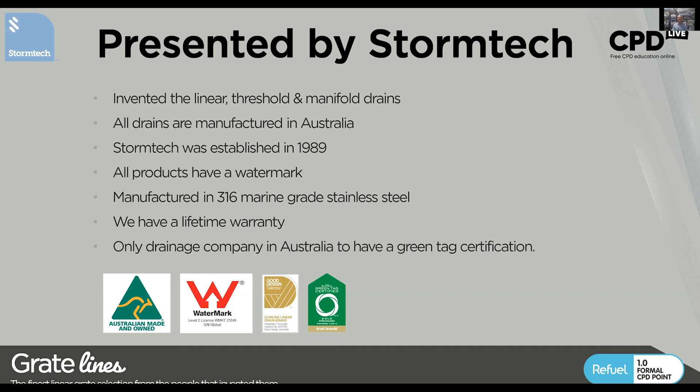All our products have WaterMark, and we seek to exceed the requirements, because the requirements, as we all know, are the minimums. And as such, we've gone for 316 marine grade stainless steel instead of the minimum 304. Given that, we can give a lifetime warranty on our products. And we are the only drainage company in Australia and the world to have a green tag certification. And further to that, we're the only green certified drainage company at all.

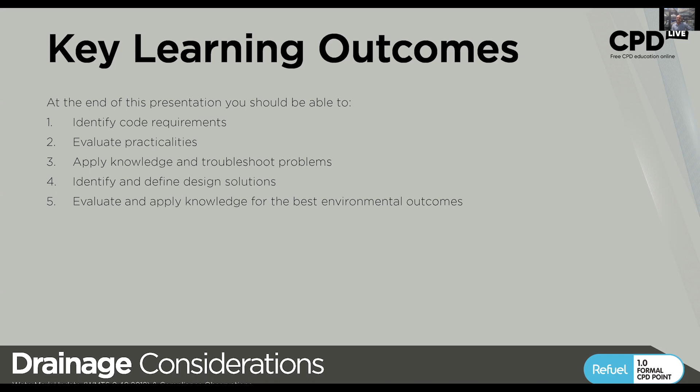Learning outcomes for this: I'm going to be talking about the code, mind-numbingly boring, but I'm going to try and summarize and highlight the important aspects for you. Let's talk about some practicalities and how to apply the knowledge and troubleshoot some problems from a design, from a product selection, and also installation aspects as well. And to be able to create design solutions that will be able to be implemented in the construction. And we're also going to be able to apply the knowledge for best environmental outcomes. So I've actually got a little bit to talk about with that.

So moving straight into it, WaterMark certification, and what is it? So the next slide here, lots of text. So the current iteration of WaterMark is 2018. That superseded the 2016 version. Some significant differences. Main reasons: 2018 introduced a materials section so that there was no confusion or interpretation of unsuitable or not fit for purpose materials. So I've highlighted aluminium here as an example.

Now, aluminium is an awesome metal, but it does have its limitations, just like various timbers and so on. Aluminium is marine grade. You see it on boats and outside quite a bit. But when aluminium fundamentally is put into cement, concrete, buried in the ground, it can fail because it's only tolerant to a pH range of 4 to 8.5.

Anyone that has a pool will be very familiar with the pH ranges of 7.2 to 7.6, and that's what our body likes. So cementitious products such as mortar, cement, concrete, tile glue, grout, bricks, they can initially generate a very high alkalinity of up to 13. That drops off within weeks to around about 10, but it doesn't go below 10. What this tells us is that 10 and the 8.5 of aluminium are not compatible. So aluminium needs to be separated from this alkaline solution. And it's particularly about crevice corrosion.

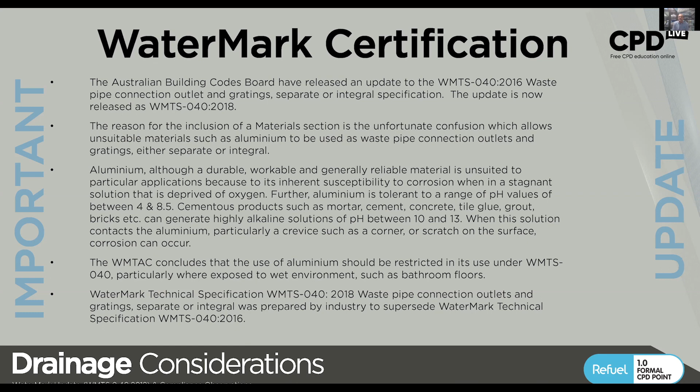So the Aluminium Council and the Australian Window Association released a technical bulletin which gave everyone insight into why this is an issue, hence WaterMark stepping in and updating the code to include a materials section. So anything specified to the WaterMark 2016 is no longer suitable and is not fit for purpose. So here's a little image to show you what I mean by crevice corrosion.

So what happens is aluminium, tough as it is, won't stand up to the alkaline solution. So the alkaline solution on its own is not the fundamental problem. What happens is the stagnant water that stands behind and below tiles, so you've got your tile lines and so on, the grout glue, the water behind there becomes stagnant. What's stagnant? It's when it's deprived of oxygen. Once it's deprived of oxygen, then you have either a mild sulfuric or a mild hydrochloric acid solution.

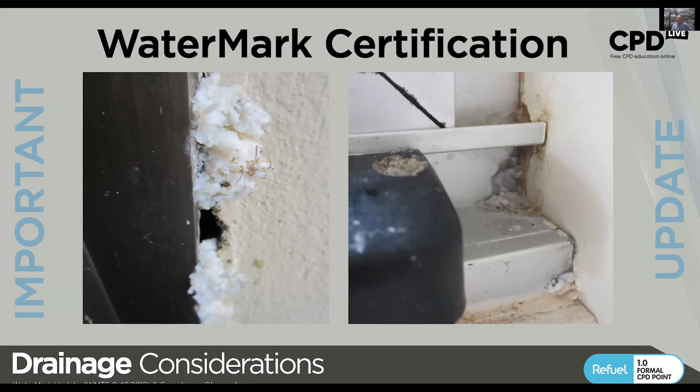By mild, I mean very. You're not going to hurt yourself with it, but it's that rotten egg smell that you might notice from damp floors and so on. That's when you're getting an aggressive solution in there. Now what happens is that solution softens the anodizing of the aluminium, and any crevices such as joints and connections in there are then attacked, and it can be weeks, literally just weeks, before the aluminium begins to fail, and it's an expensive job to remove it. Aluminium gratings in, say, plastic channel and so on, they're fine, there's no problem with those.

Moving on from that, let's have a look at some considerations for drainage in different applications like bathroom, laundry, and thresholds. So if we look at interior areas, bathrooms are obviously one of the more popular areas to personalize, particularly from a design perspective.

From an installation perspective, it's also one of the more critical rooms to get right. So what are the really key considerations? How much water we're putting in and how we get that water out. Very simple, but the devil's always in the detail.

So what we're going to do is a little introduction into Australian Standard 3500 in relation to drainage. So 3500 covers a lot of areas, but the drainage is what I'm going to focus on today because I'm the drain guy. Yay, good for me.

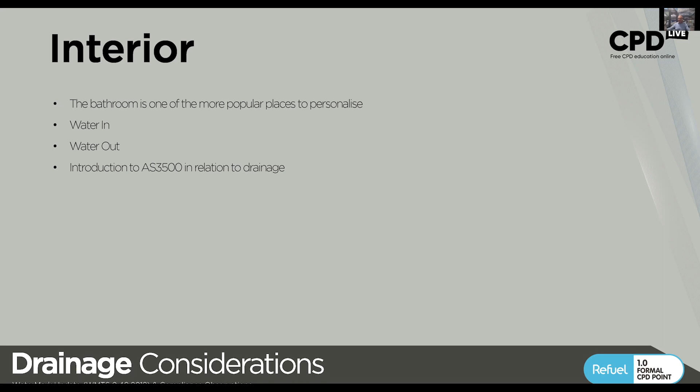So before we go into the code itself, where does the code get its information from? Now, I like to introduce people to this because AS 3500, the NCC, BCA, PCA, etc., all take their information from some very fundamental Australian standards and codes. I call them a foundation standard because it's what the rest of it stands on.

3500 takes its information from lots of different sources, and for this, we'll be looking at what's related in 3500, the current version, 3500 Part 2. Part 2 is the sanitary drainage section. 2018 is the current version. So we've got two real aspects in 3500 that we're going to be focusing on, and that's Part 4.6.7 and 13.17. 4.6.7 is about sanitary drainage, and Section 13 is about fittings and fixtures.

Where do they get their information from? They take their information from AS 2887, waste and grates, and WaterMark. Where does WaterMark get its information from? It gets its information from 2887. Now, this is a very old document. It dates back to the 60s, and there's also some other aspects of it that we'll talk about now.

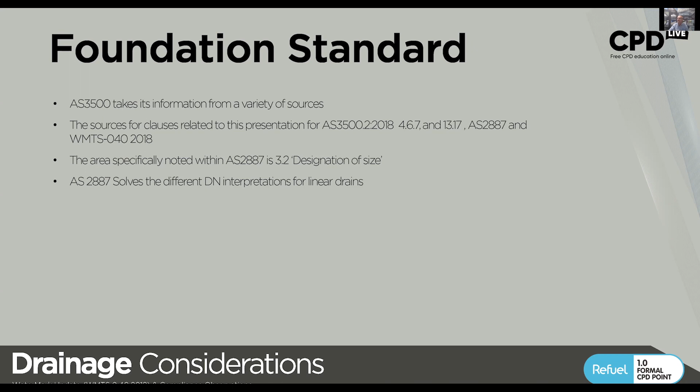So why is this important? I'll show you. So on the left, we have WaterMark WMTS 040 2018, which is the old MP52, and that does come from the 60s. AS 2887 is from the 80s and 90s, unchanged from the 90s. They've just done a bit of a text update to it. What I draw your attention to is the two tables, Table 1 and Table 3.1. If you can see it clearly on the screen, I realise the right-hand one's a little bit fuzzy. You'll see that they are identical.

I want to point this out because it shows that WaterMark takes its info from 2887 and so does 3500. The information transferring through from the foundation to the current iteration is identical. And it's critical information for designers of drainage like me for the product side, but it's also important for yourselves to understand where this information comes from so you've got a better idea of what size suits what.

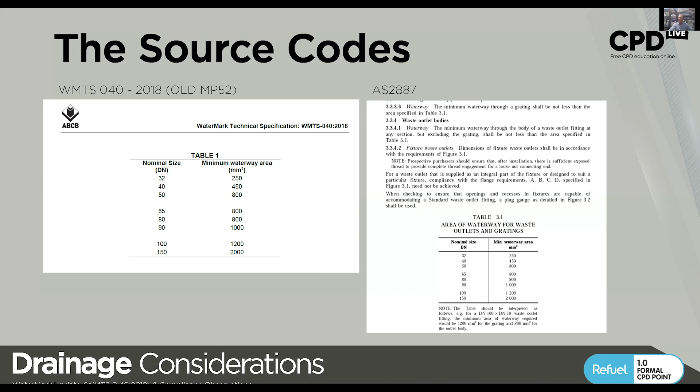So the water in the drain, that's called the waterway. There are two aspects of the waterway in a drain. Firstly, the waste outlet connection of the waterway, so that's the bit that goes into the riser. Then it's the grating waterway, and these are different components. Linear grates, as I'm a specialist, obviously I'm talking about those a fair bit. Linear grates have a far larger waterway than the waste outlet.

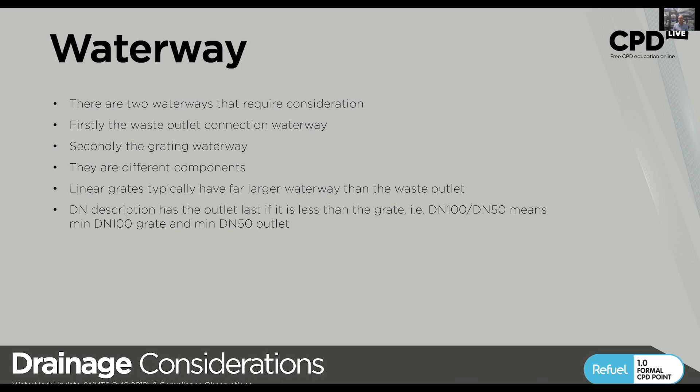Now, when you're looking at the DN description, DN is the fitting outlet size descriptor, a linear grate has a large waterway. The outlet has a pretty much fixed waterway, so whatever is largest goes first, and the outlet always goes last. So if they're the same, then it'd be 50-50, but in this example, I've gone a 100 grate over a DN50 outlet. Here's a picture.

So the DN for the grate. You can see a linear on the right and a standard centre waste on the left. So the grating has a DN 150 rating, and in reality it's more like a DN 1000, but we limit it to a 300 mil length. You don't need to worry about that; I just like to explain these little details. So you can see there are two DN 50 outlet wastes.

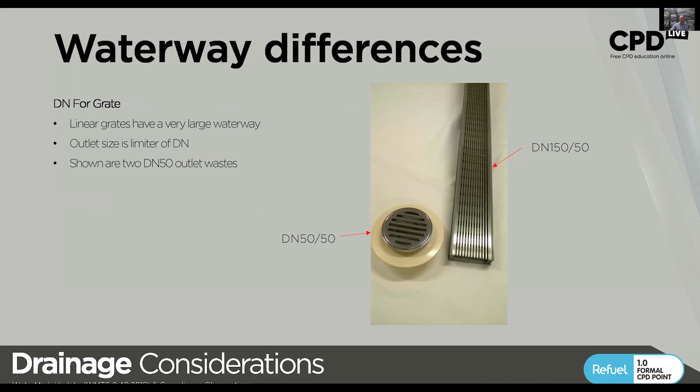So here's a different way to view the same part. They both have the same size waste outlet to connect into a DN 50 riser in the bathroom. But as you can see, the grate on the left, the standard grate, has a very small waterway compared to the grate on the right.

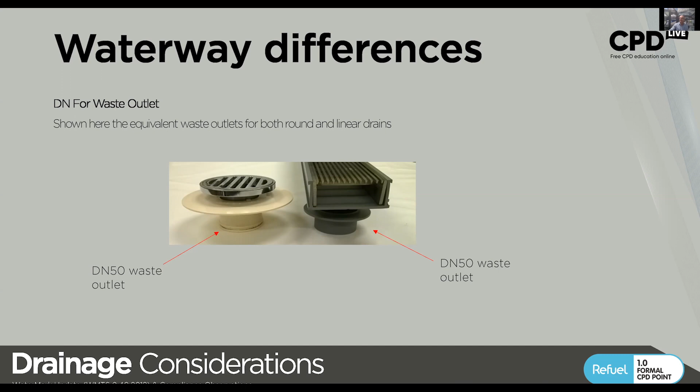So, fit for purpose. What is the WaterMark fit for purpose? Well, fit for purpose just means it's been tested, mechanically tested, physically tested, and dimensionally tested. Fit for purpose means, as best as we can tell, it's fitting to the minimum requirements. Let's not forget that standards are the minimum, not the maximum. It's accredited to the minimum requirements for plumbing safety. It's the old type tested that's been moved forward.

Now, devil in the detail. The little jobby on the picture there is watermarked as a system, which means you can't use these components separately.

You can't throw away that little grate and use that flange on its own. That would be a non-complying construction method. And for those on the installation side of the presentation here today, watch out. You will be at fault for that mistake. And what that means is your building insurance will be void.

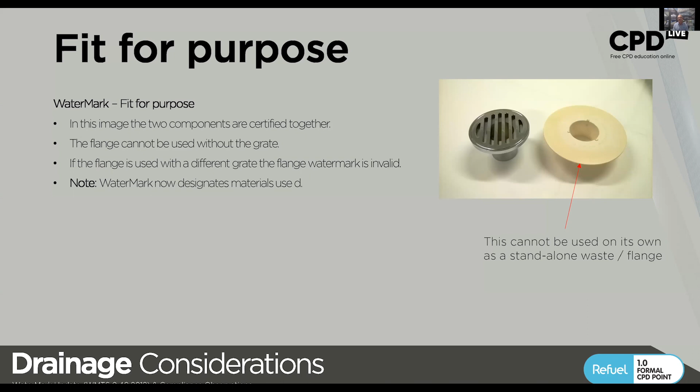So I point this out because it's an area I've been involved in as expert witness on a number of jobs, and that has come out as part of the problem because it didn't work, either because the DN was incorrect or because the installation was incorrect, and they didn't use the system as it was intended.

A couple of observations for you. Around the country, the standard is the same, but there are typical uses. So Queensland, 50 shower over a 50 riser. WA, it's DN 80, which is very popular. South Australia, it's 80, but that's now in recent months moving more towards 100. Victoria, DN 50. NT, DN 50, but NT varies a lot.

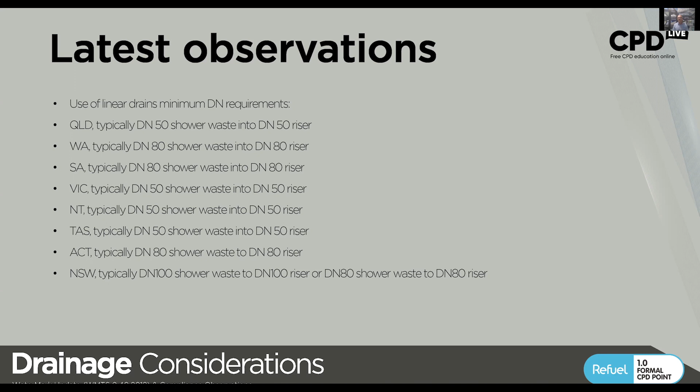It depends on where the developer or the builder is from, and they use their own preferred method as long as it sticks to Australian standard. ACT is 80, very popular, although again that's shifting to 100, and New South Wales is 100. A little bit of information on why DN 100 is becoming more popular: it's just because it's cheaper than DN 80 on the piping side.

The two waterways in a bathroom. So as I mentioned, AS 3500 Part 2, 2018 is where we get our code minimum requirements. I've already covered 4.6.7 for floor waste gullies, and for the grating it's 4.6.7.6, and that actually speaks about linear drains and standard wastes. The other part, fittings and fixtures, 13.17 showers. I'll talk a little bit more about that because there's a difference between individual showers and common showers.

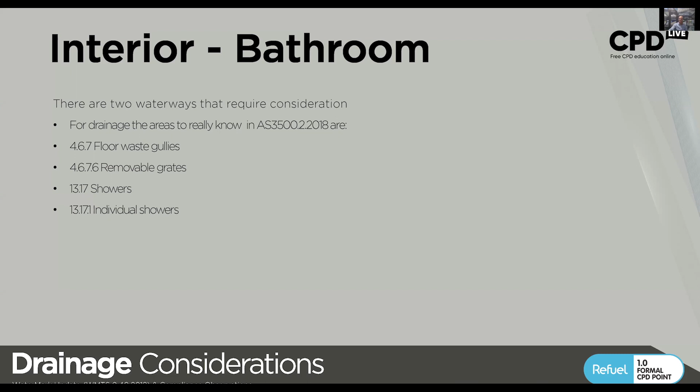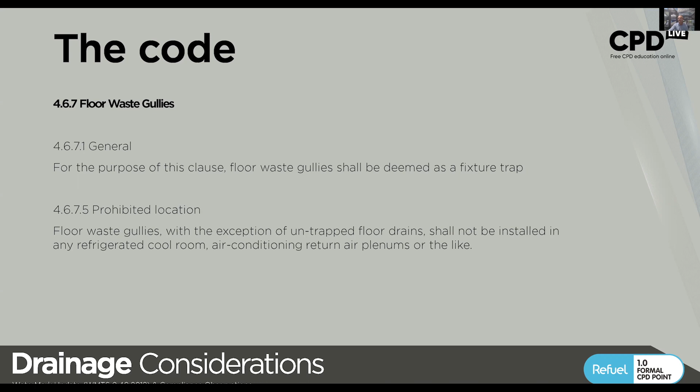For the code, 4.6.7, I'm not going to labour this too much, but it will be deemed as a fixture trap, which means it fits in Part 4 and Part 13. And prohibited locations, this is something for people to remember. Floor waste gullies shouldn't be installed in any cool rooms and air conditioned return areas. So that's more for commercial application, but it's good to know. And also those locations typically require a load rated grate because you're getting trolleys, pallet jacks and so on going through there.

But there's a practical aspect. There aren't many people in the trade, plumbers I'm thinking of here, that can get their hand into a DN80 to clear a trap out. With DN100, just about everyone can get their arm down about 300 mil to the trap.

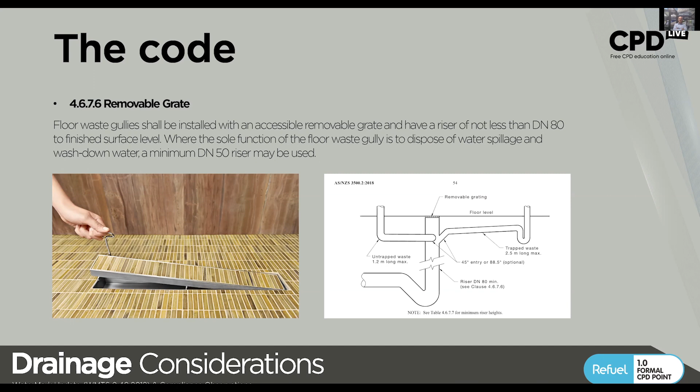And for a shower, you need to have a minimum DN80 riser coming towards it. And we'll go into that on the next slide here. So if you look at the top, again, a little bit fuzzy, I apologize for that.

If the shower drain is intended to be the only floor waste in the bathroom, then it needs to be minimum DN80, though DN100 is practically better. That affects your design - you have to make sure the grating is at least the DN of the riser. Now, if you have a main riser in the bathroom that's in the floor but not in the shower, then you can run the shower with a DN40 waste. So you don't have to stick to a large grate in the shower if you've got another minimum DN80 floor waste gully in the bathroom.

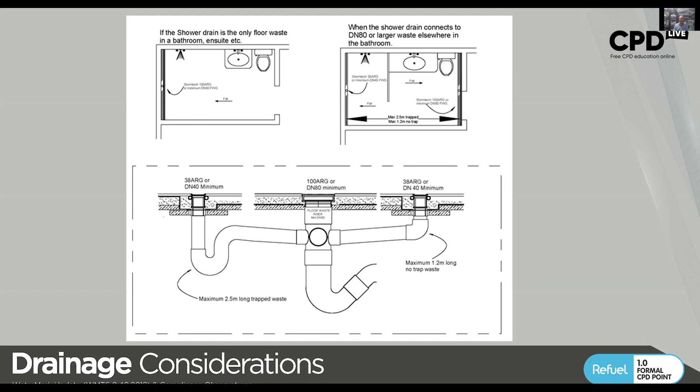So we'll go on now to a bit more on the shower side. We're under fittings and fixtures, part 13 of 3500, individual showers. An individual shower shall be a minimum DN80 grate or channel grate, and shall be connected by an untrapped waste not smaller than DN40 to a floor waste gully - that's the picture on the right here - or a trapped waste pipe not smaller than DN40.

I've put a note in there for prefabricated shower bases - this is literally extracted straight out of the code, word for word: in accordance with manufacturer's instructions. So to the specifiers and installers here, there's two things to bear in mind. You've got the code, which is the minimum, and then you have manufacturers like me with our installation instructions. When we're certifying a product, our installation instructions are also assessed to determine whether they're suitable to achieve the minimum. So when specifying and installing, it's critical to check not only the code, which is the minimum, but also the manufacturer's instructions.

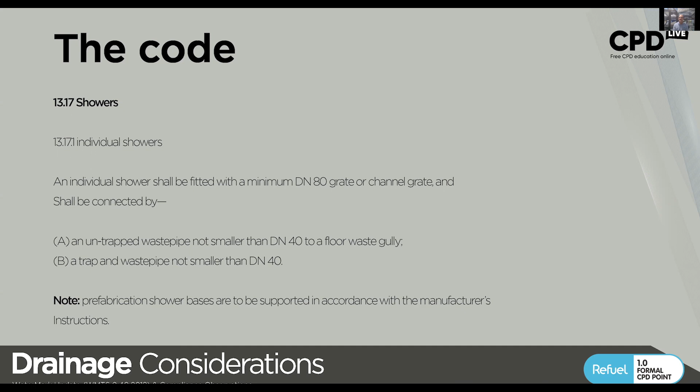In those that have had waterproofing shenanigans, you'd understand that something like water-resistant plasterboard - no manufacturer actually says it can be used in a shower without it being waterproofed. Little word to the wise there.

Now here we come to shower groups. We've just done individual showers, now shower groups. So what's a shower group? It goes to a common shower, or common channel. Often shower groups go to a common channel - that would be something like a gymnasium or a barracks, where you've got a linear drain at the end of the room and a whole bunch of open showers or shower cubicles all draining to a common channel.

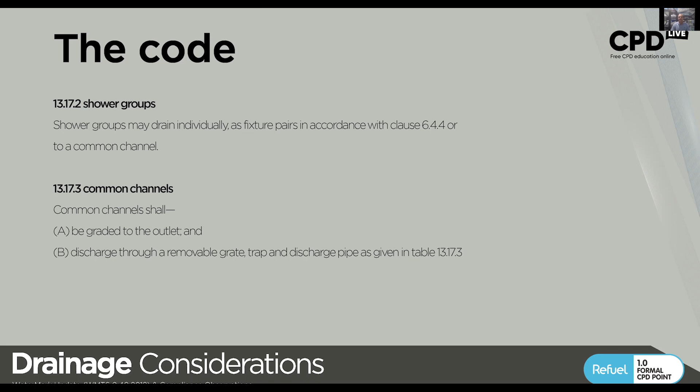This next table tells you the size of the grate - hence why I wanted to highlight that there are different DNs of the grate and the discharge pipe. So one shower: minimum DN80 grate, and the outlet pipe is minimum DN40 - but don't forget the distances and riser issues there. Now, if you've got 2 to 3 showers, same size grate but DN50 waste pipe, and 4 to 6 showers, DN100 grate with a minimum DN65 discharge pipe.

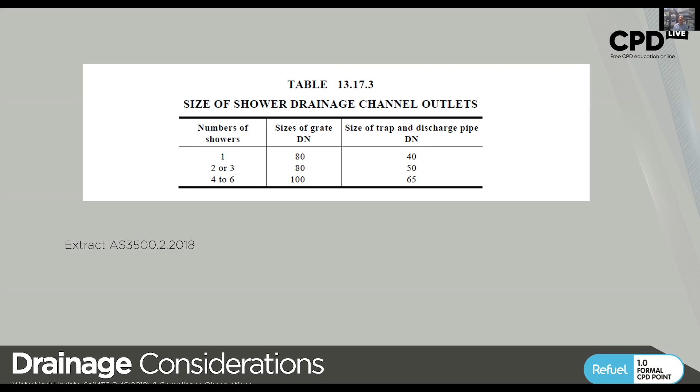Rule of thumb, to make it easy to not only achieve the minimum but avoid certification issues: go with DN100 on your discharge pipe and your grating. Unless the design aesthetic calls for minimizing the size of the grating, then you can take it down to DN40 and have a disconnector gully. We'll talk about those later.

So the practicalities - do we need a floor drain in the bathroom? Not really. If you have your shower waste sized to suit the minimum DN80 riser requirement, it's contentious whether you have one in the main bathroom floor, but it does solve design issues, and it's relatively cheap at the design stage to include in construction because it's very easily costed for the builder.

So you can have just one in the shower, and the shower can be used as a floor waste gully - but remember the code. Now we've got wall installations. I love putting my drains up against the wall - it's just some of the best look, and I've got new product releasing later in the year to solve that and make it look invisible. But I'll leave you with that tease and show you a nice little photo here.

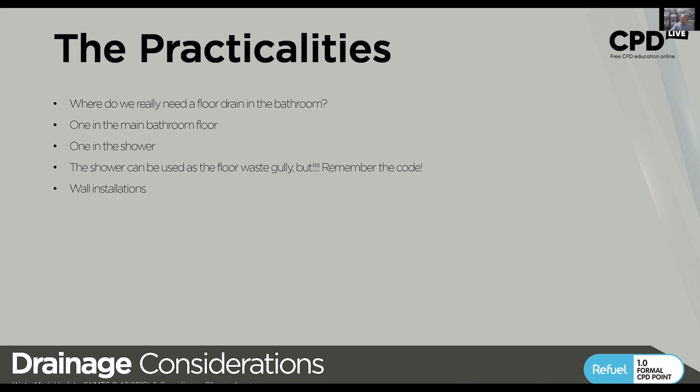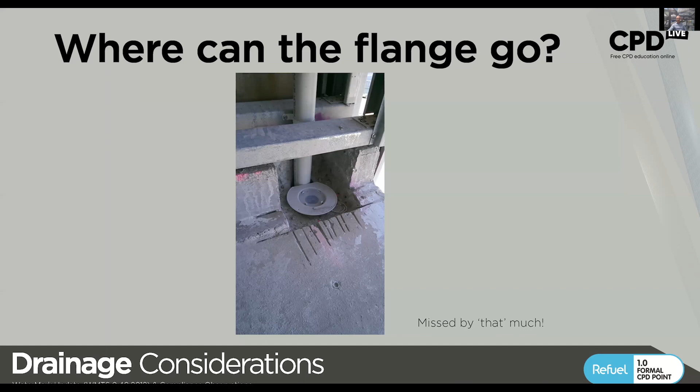Where can the flange go? AS 3740 for interior or domestic wet areas requires a flange, a leak control flange, onto your riser pipe. This is a really good example of what I see time and time again on a building site - once that wall is constructed, you've got virtually no access to that drain, and the grating outlet has got to be severely offset. That's something I've seen, and I think we've all probably seen that. So just because it looks good does not mean it is correct.

Now it's important to understand the current iteration of WaterMark. It is 2018. Why do I say that, and why do I give you the answer flat out? It's because a week and a half ago the ABCB released the 2020 version, and I have a 2020 version of this presentation, but they've rescinded it and reverted back to 2018 until they work out some technical issues.

Is PVC a suitable material for sanitary drain? Of course it is. Now the minimum DN connection for a shower - I put that one in there to trap you, because I've been talking about DN 100, but if you're connecting the shower from an accessible main riser elsewhere in the bathroom to the shower, or a disconnector gully, which we'll get to, DN 40 is the one.

Yes, custom drains can be manufactured to size - that's what I specialize in. Floor waste gullies shall be installed with an accessible removable grate. Of course they should - how are you going to maintain it if you don't?

Can you install a non-WaterMark sanitary drain? Trick there - the really interesting part is the term sanitary drain. Stormwater does not have WaterMark. So for sanitary drain, if it doesn't have a WaterMark, no, you can't install it.

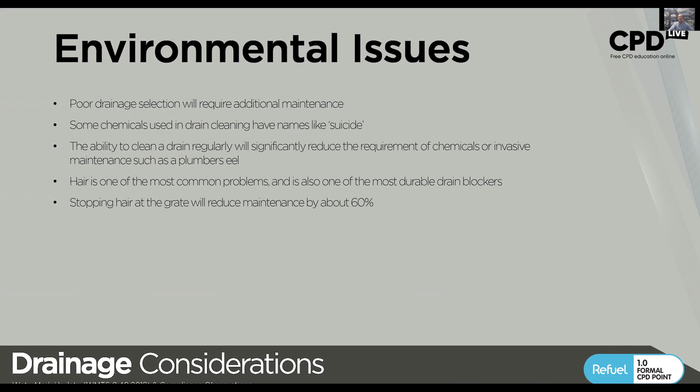Hair is just - I mean, look at mummies. They dig them out of the ground after thousands of years and they've still got hair, sometimes with the henna in it. Hair is about 60% of drainage problems, so it can and will persist in drains for years, and people have a lot of fun with their hair.

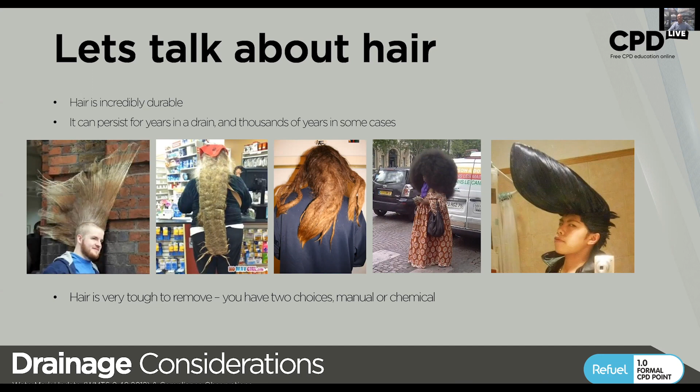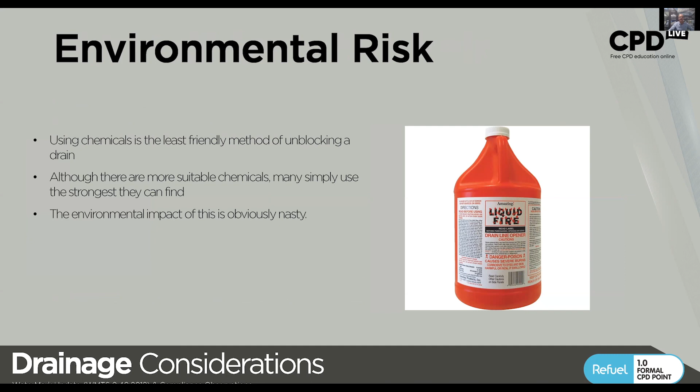Hair removal: two choices, manual or chemical. What's the problem with hair? 60% of shower blockages are from hair. Liquid fire is one from down the road, and it's pretty obvious how bad for the environment that would be.

Sensible options - obviously I do linear drains, but a standard centre waste can do this as well. Reduce the hair at the grating; use the grating as a GPT, a gross pollutant trap. Strainer grates are the most effective because you stop the hair at the surface and don't have the maintenance issues. I've had them in my house for over a decade and I've never had a hair blockage.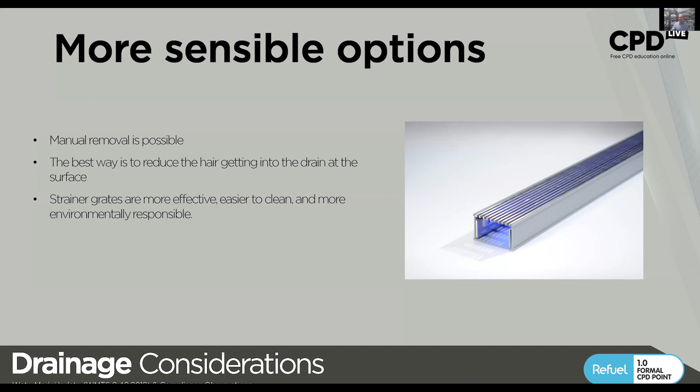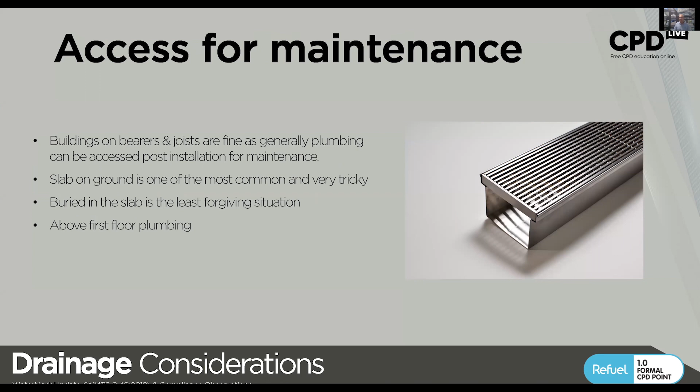Access for maintenance - so when we're designing, making sure we've got access for maintenance is critical. Bearers and joists, you can typically get underneath it. Slab on ground, no you can't. Buried in the slab - having started out in the concreting industry, it always bothered me, because your vibrator in the concrete can crack the pipe and you've got one heck of a situation to fix. Above first floor plumbing, you can typically access it through the ceiling.

Now, going back to the wall application, there's a specific requirement, and this will be coming up in the latest update to 3740.

And we'll talk about disconnector gullies very shortly. So we've got here an image of basically a flanged channel that becomes your leak control flange connecting directly to the pipe, and your waterproofing is adhered directly to the tray flanges.

As per the current iteration of 3740, these flanges must be a minimum of 50 millimeters. 20 mil is a tiling flange. And again, if that lets go, the building insurance is void. Make sure you do a 50 mil flange. This allows you to have the drain right up against the wall, be it a grating type or a tile insert type. So here we have disconnector gullies.

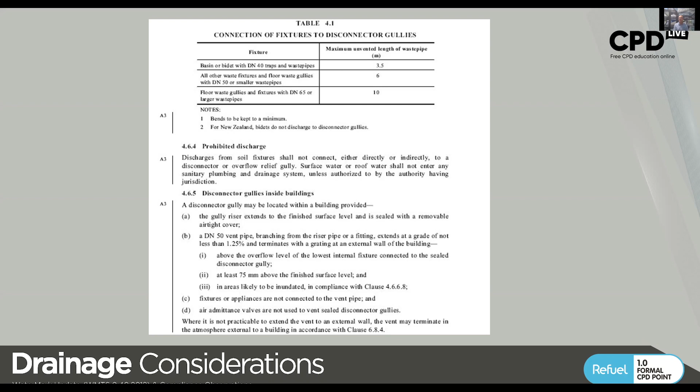What is a disconnector gully? A disconnector gully, as you can see from the table there, gives you a much greater distance from your fixture waste to the trap, to the gully. So I won't dwell on this for too long, but it is important to know that you can get an extension on these distances by using a disconnector gully.

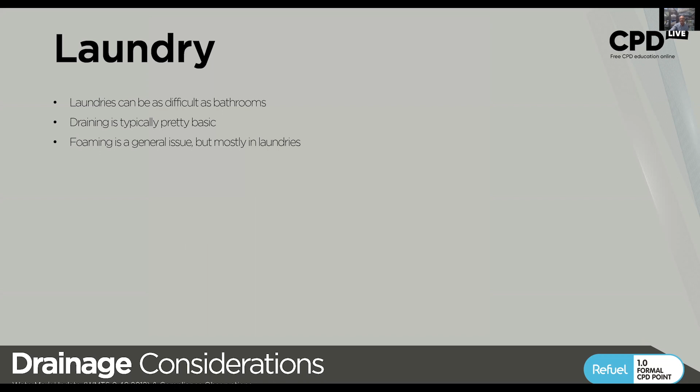Now the laundry. Laundries can be as difficult as bathrooms, mainly from a waterproofing aspect, but the drainage is also critical because it's very basic drainage. You don't actually need a floor drain in a laundry, depending on the jurisdiction you're in. And foaming is a general issue for all drainage, but it's mostly an issue in the laundries, occasionally in the kitchens and the bathrooms. Depends on the hardness of the water typically.

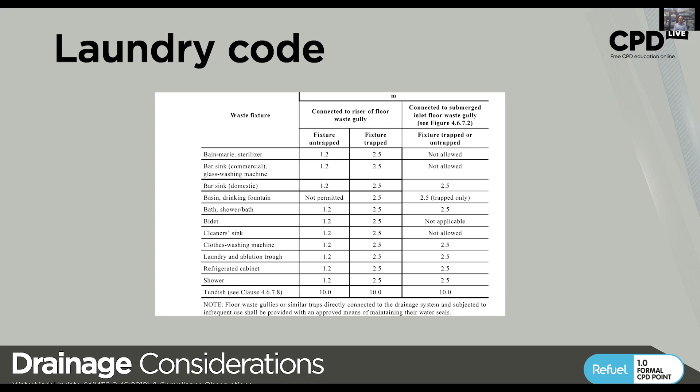So here we have a quick summary, again, an extract straight out of the code. And you can see that you've got the connection distance to the gully, and it's pretty much identical to the bathroom one. Just wanted to highlight that for you. So the laundry code is pretty straightforward.

So here's a bit of a summary. DN40 is the minimum connection. Most of the time, it's a DN50 connection because it's cheaper than DN40. Section 8.4 talks about your laundry troughs, and no trough or washing machine is to be connected directly to the stack, you use a disconnector gully. Those in the trade or those dealing with plumbers directly, they'll often call that a disco gully. And section 11.23.2, again, the minimum is DN40.

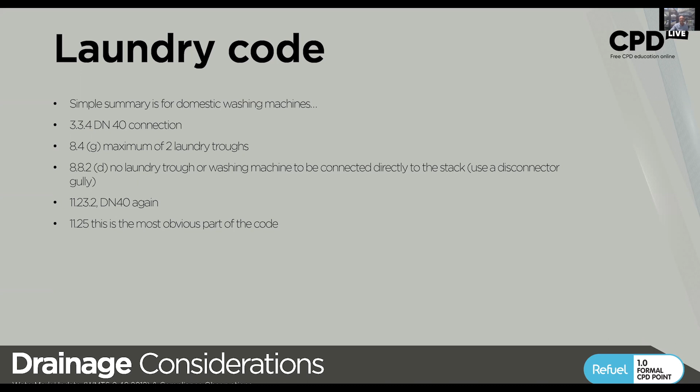And here we go to 13.25, clothes washing machines. Again, they're talking DN40, but the reality is most of the time it's DN50 as it's cheaper and easy to use.

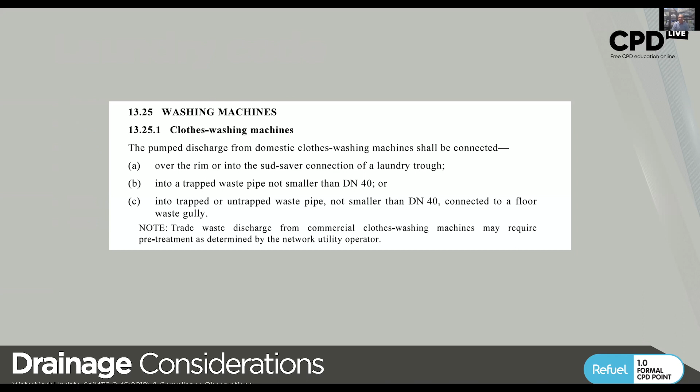Laundry practicalities. So from a design perspective, if you're putting a floor drain in, it should be near the troughs and the washing machine if possible, because you are going to be typically doing a 1.2 or 2.5 metre connection to it. And if you have a floor drain in there, it should preferably be near an external door. And generally only one floor drain is required in the laundry.

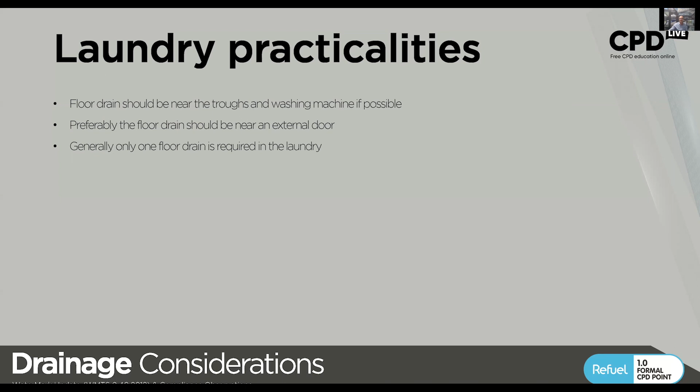Problems: foaming, as I mentioned, is a main issue. Insufficient drainage, now this is in the laundry, we're dumping our clothes on the floor. If you've got a centre waste, they can be blocked. And drain blockage in the laundry is generally due to the high use and debris from your clothes like lint, but you'll also find coins and paper clips and hair clips and so on in there as well.

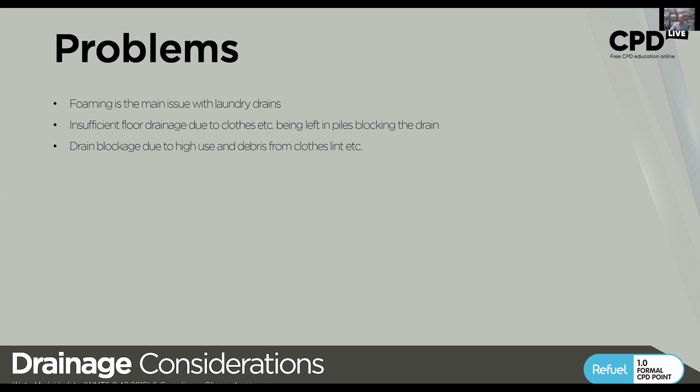We've spoken about foaming. You can run it through a sud saver, so it's reusing the previous water. Extend the distance up to 2.5 to the main waste. For drains being covered over, a linear drain is a simple and elegant solution, because no matter how many clothes you put down, there's typically a point where the water can sneak into the drain, same as in bathrooms and floor mats. Oversize the drain to make it easier for access to cleaning, as I mentioned before. So it's very similar to the bathrooms. And again, disconnector gullies, which could be on the outside of the building, make it easier to access for maintenance.

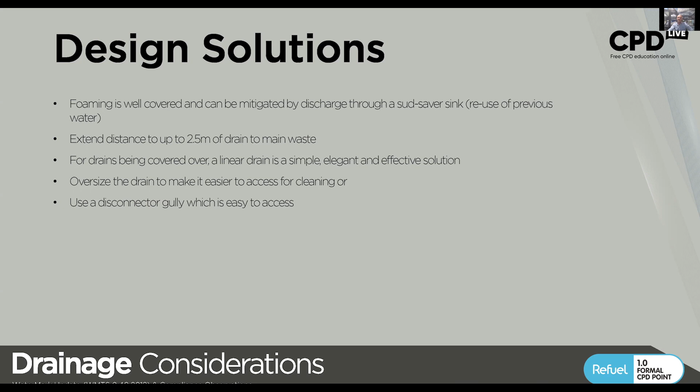Now, thresholds. Thresholds are something I've loved to introduce to the Australian and the world building industry. Why do we do level thresholds? It was mainly for the elderly and those in wheelchairs and so on. It wasn't meant to be a designer feature, but they do look good. If anyone's ever seen the movie The Party, that one's a very famous property. You can still go and visit in Los Angeles, and they have a lot of level thresholds with no drainage. Apparently it's hard to maintain.

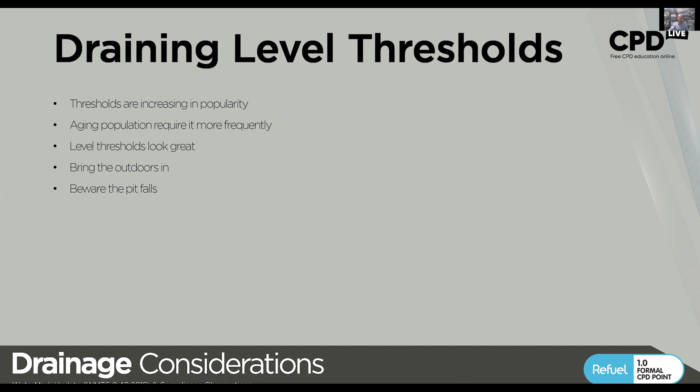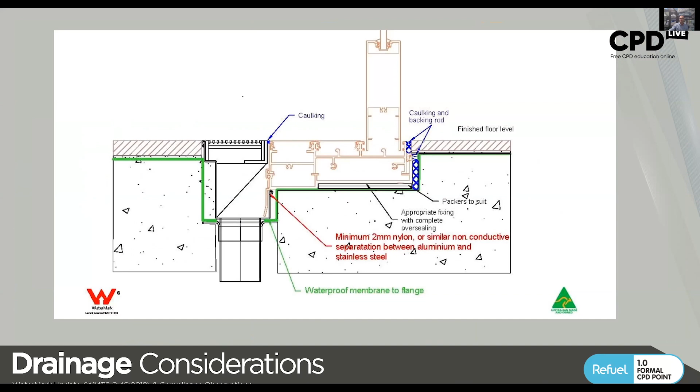The code for level thresholds is mostly covered under the external waterproofing code 4654, with an aspect also in the NCC. Instead of going through all the text, here's a picture of what that code intends: your door track and subsill are above and separate to the waterproofing, with drainage outboard and lower than the subsill, and level grating on top to provide the finished level surface.

3500 also talks about a level threshold, and as you can see here...

We need to stop water from entering the building. For the design aspect, you need to slope the surface away from the door. Even though you have a drain at the door, do not slope towards the door. The grating is there to take water away from the door or window, not from the surface area—you still need to slope it away.

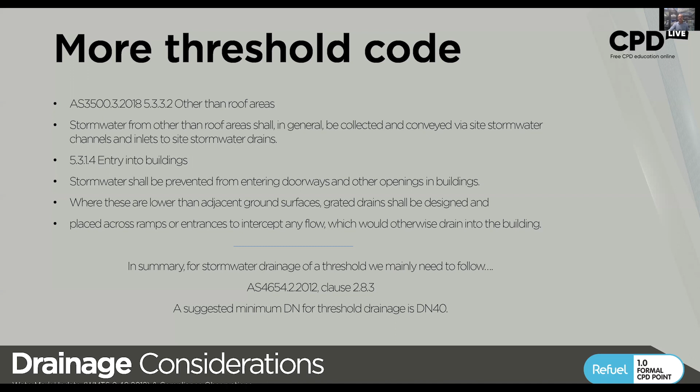Then we've got the practicalities of it. A step down is normally how we waterproof the building to make sure water from the outside doesn't make its way inside. That step down is typically determined by the terrain category—an N2 area typically means a 50mm step down, and you can create that step down within the drain as per 4654.

Most door and window manufacturers are now familiar with level thresholds and can accommodate a level drain for you. Obviously, they often come to us to do it for them, and other guys like me. Now, the drain component alters the sequence of construction, so when designing or installing, you have to understand if you've got a linear drain or a level threshold—often the drain needs to go in at the threshold before the door track, and that can really cause problems on the construction sequence and cause delay, which we don't want.

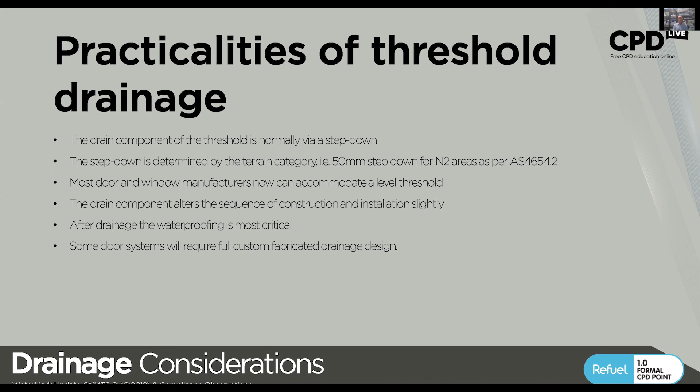After the drainage, which is my area, I think what's more critical is the waterproofing. So 4654 and 3740 are the two key codes to examine. Some door systems will require a fully custom fabricated drain, but that's pretty easily accommodated these days.

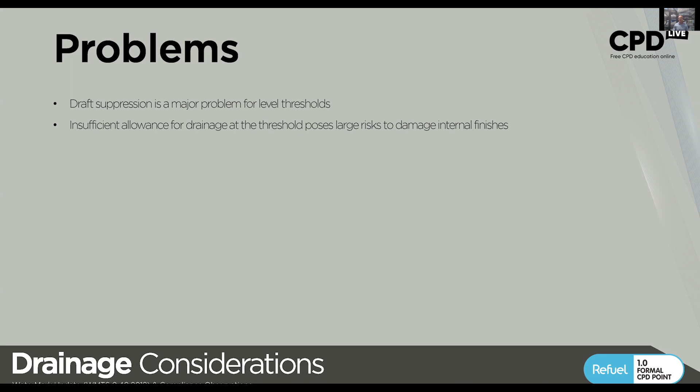Problems: draft suppression is a major issue for thresholds, so make sure you have the appropriate internal draft suppression for your sliding door that is not touching the drain or the door track. Insufficient allowance for drainage at the threshold poses a large risk for damage to internal finishes—damp onto your timber floor is probably a good example.

Design solutions should allow sufficient depth for the water to fall below the subsill. Key word: subsill—because the drain has to be typically about 30 mil lower than the subsill to allow for the volume of water in a 100-year rain event.

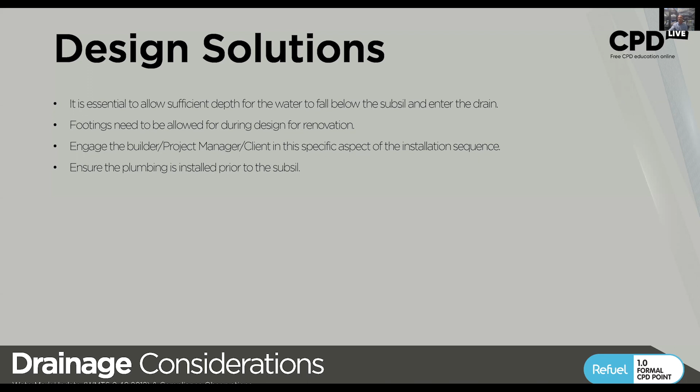You might need to look at how you're doing your footings to allow for a level threshold during design, or if you're doing a renovation—but also on the installation, it's not necessarily business as usual. It's critical to have all stakeholders engaged on this one detail: the builder, project manager, and possibly even the client, because it might change what they expect. Ensure you've allowed for plumbing to be in the correct position before installing the subsill. You can achieve some beautiful results like this one.

So, where does the water go? Typically, insufficient depth for the water to fall below the subsill is something I see a lot. Again, as I mentioned, the footings—it is a collaborative effort to get these right, and as I mentioned, the plumbing's got to go first.

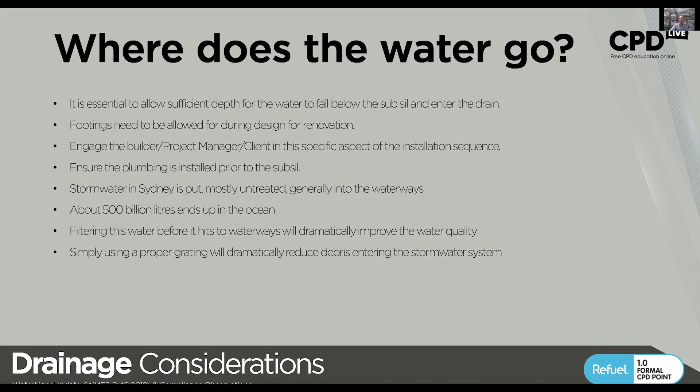In Sydney, stormwater is put mostly untreated into the waterways—about 500 billion litres ends up in the ocean, which is about the entire Sydney Harbour in a year. So filtering this water is incredibly important because it hits the waterways and will improve the environment for all of us. Using the correct grating will reduce the amount of debris getting in there.

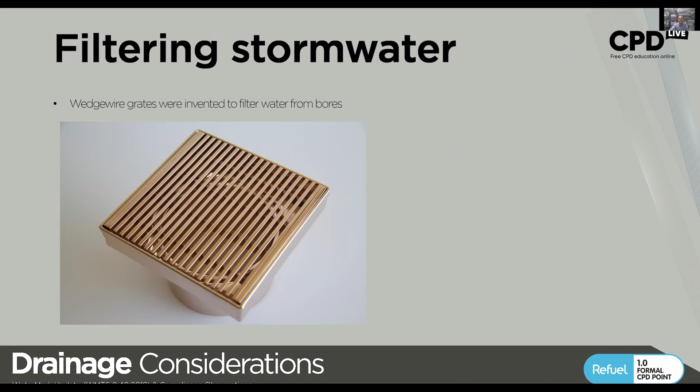Wedge wire grates were invented to filter water from bores about 100 years ago. We investigated what the best filter grates are and went to a 2mm aperture grating. It stops hair really well, also stops cigarette butts being ground through, and stops drinking straws getting pushed in and blocking up a linear grate.

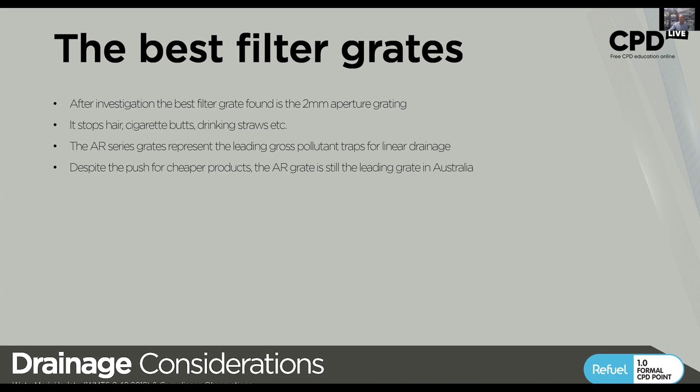The AR series is pretty much the best gross pollutant trap for linear drainage. Despite the push for cheaper products, we've discovered that Aussies are pretty switched on, and it's still the leading grate in Australia. There's a little infographic you can grab from our website, or obviously from this presentation as well.

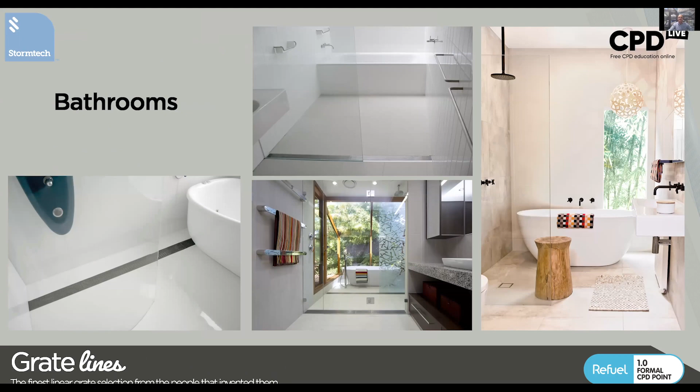So here we have some applications. We have bathrooms, we have the thresholds, as you've seen most of those, and there are commercial solutions—there aren't many drainage applications or aesthetic solutions that we can't provide.

The bottom left example is the drill core library in South Australia, where we were actually asked to produce a grating out of Corten to match the facade of the building, which we did, and it does match the building.

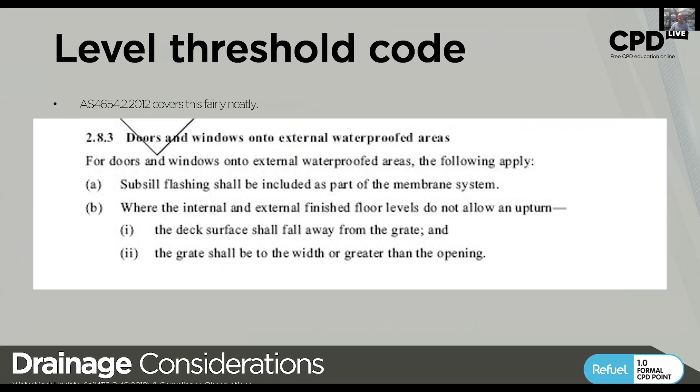If you don't have a drain being used frequently, that water will evaporate, and 3500 requires you to use something like a trap primer to drip water very slowly into that drain to maintain the water seal. If the water seal's gone, that will be the main reason for you to get an odour in your drain.

The water seal serves two purposes. One is to reduce pest intrusion, although as we all know, cockroaches swim quite well. And two, the main one, is for odour issues.

Cool, thanks, Troy. Last question I have here from Joanna. Can you please explain what a disconnected gully is? Yes.

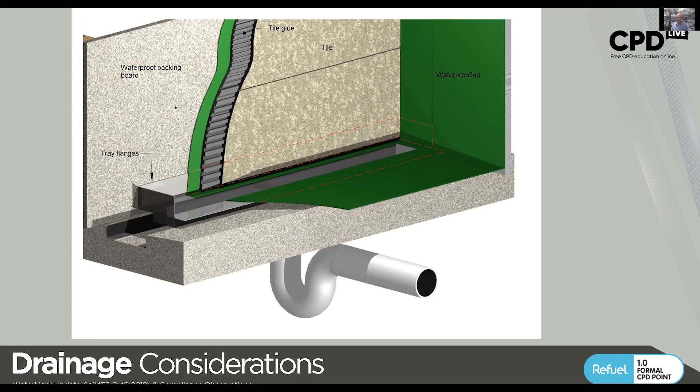I'll just swap my screen sharing. I'll just see quickly how I can go there. I've actually got that up on the screen. I wonder if I can just go out of full screen mode, and I'll go to a PDF. Where's the PDF? I'll do this as quickly as possible. There we go. Fixtures, disconnector gullies. Have to minimize that for a moment, everyone, sorry. Oh, come on. Disconnector gullies are fun things. Where are we?

This is the fixture unit rating that plumbers always forget. Junction stacks. Tundish. Okay, we're getting very close to it now. The discharge of floor waste gullies. 4.6. Okay. So that's a submerged one, and very close we get to. Okay, we're going to run out of time, oh no, it's still got another few minutes. Sorry, I'll find it correctly for you. Charging, floor waste gully riser. So this is straight out of the code. Inspection openings.

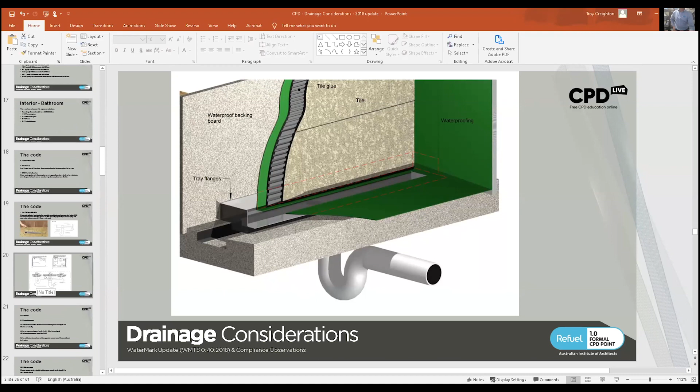Actually, I'll give you a shortcut. I'll just jump back into the presentation here and just run up to the drawing here again. So, I had disconnector gullies. Let me just see. No, I'd rather show you the exact disconnector gully part. Or if I go here. Oh, here we go. Here is a disconnector gully. I thought that question might come up. So if I just bring you here. Oh, goodness. Can everyone see this image here? Is that coming up on the screen for you guys? I can see the diagram in the PowerPoint with the drainage consideration. Oh, it's only the PowerPoint? Okay, I'll have to go back to that. So apologies, I can't show you exactly a disconnector gully, but can you see my cursor moving around on the screen? Yeah. Yep, okay.